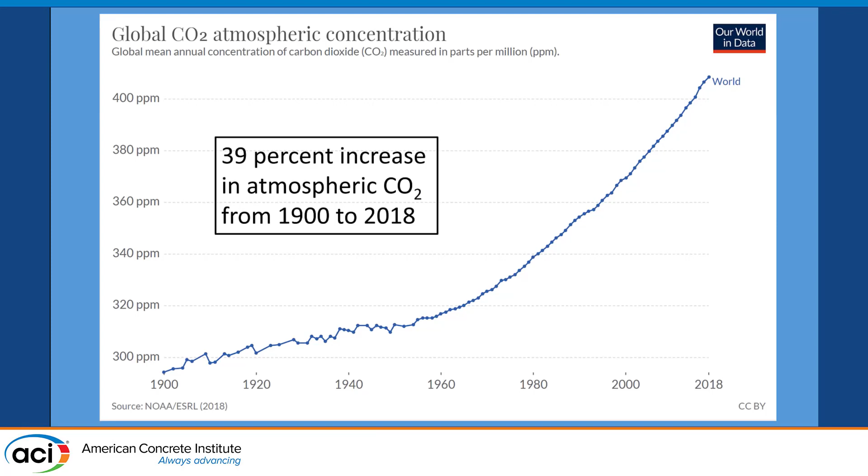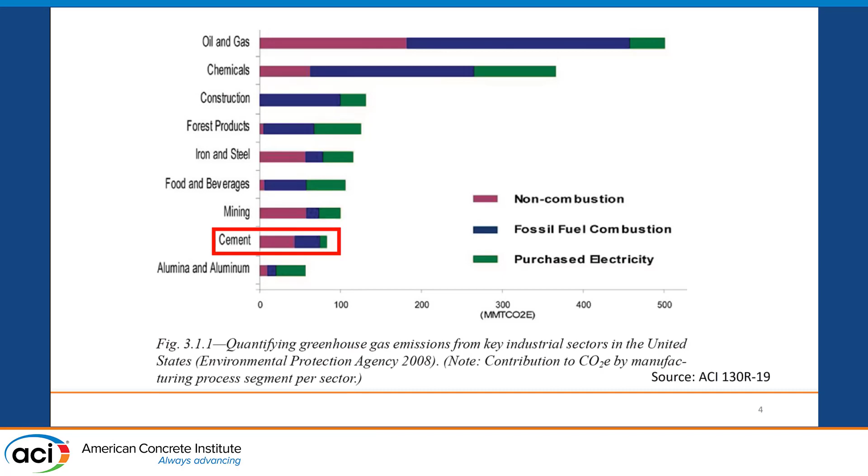So we can talk about a lot of different metrics and measures of the environmental effects of cement and concrete production and construction. But to me, the most important statistic of all is this, that each year, more than 4 billion metric tons of cement are produced, and that production accounts for 8% of the global CO2 produced. There are various estimates ranging from about 5.5% to as high as 10%. I've chosen to quote here a summary by Chatham House on concrete sustainability, where they cited a figure of 8%. In any case, that's a very large number.

And as I see it, the engineers, researchers, industry people, we're a group of very smart people. And if we can reduce the contribution of cement production and concrete construction, if we can even take 1% off of this number and make it 7%, we will have been contributing significantly to the reduction of CO2 in the atmosphere. So, we all have our talents and our ideas and our training, and I think we can do this. We can make a significant reduction if we put our minds to it.

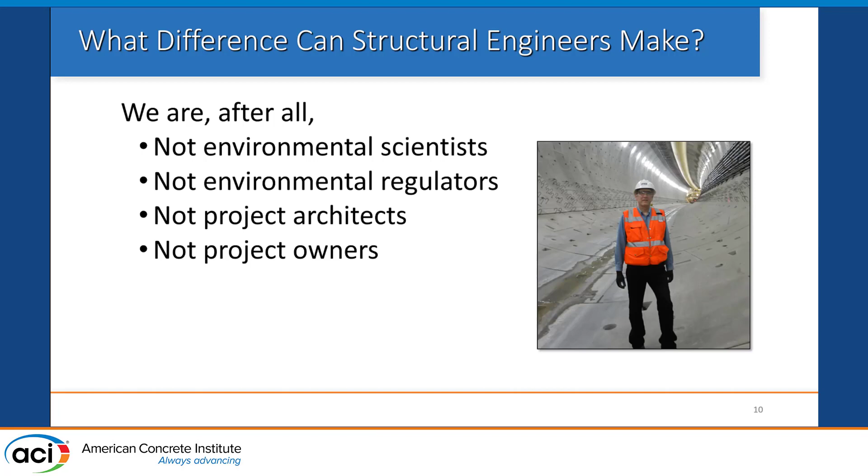I'm not a regulator. I can't help write rules or regulations related to environmental management. I'm not the architect. When I work on a project, many of the key decisions about a structure are made by the architect. And I'm not the owner of the project, so other key decisions are made by the owner about sustainability goals and so on. So what does that leave for me as a structural engineer to do in this process? Well, there are a few things, and I'll touch on these here in this list, but I want to emphasize the last bullet item when we get to that one.

So simple things that the structural engineer can do is to actively specify concrete mixtures that make use of alternative cementitious materials. We've just heard about a couple different solutions from the previous speakers. It's now possible within the context of the ACI 318 building code to use recycled aggregates, including crushed recycled Portland cement concrete as aggregates. It takes a little more work, more diligence, and paying attention to the quality and properties of the recycled aggregates compared to using new aggregates. But it is a possibility, and we as structural engineers can suggest that recycled aggregates be used.

Traditionally, we have assessed the strength of concrete at a time of 28 days, about 1 month. There is actually no reason why we can't say that the time for achieving sufficient strength is 35 days, 45 days, 60 days. If we can obtain a more sustainable product by allowing more time for it to reach its design strength, I think that is an excellent way for the structural engineer to influence that directly.

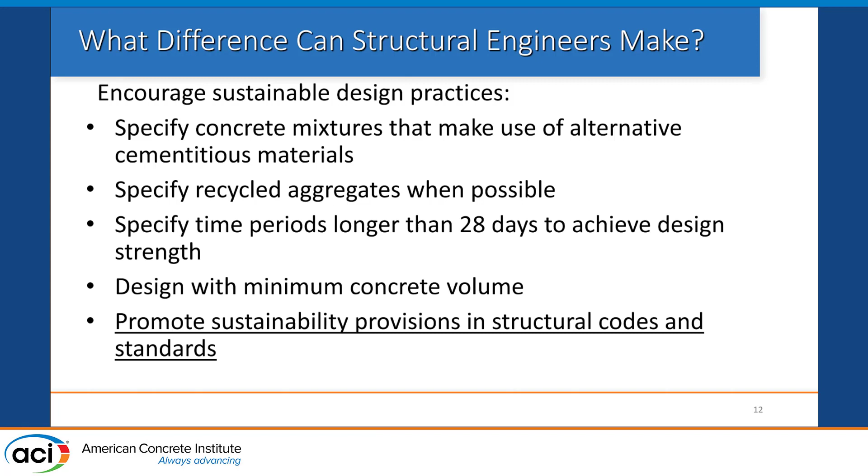And finally, I want to talk about the engineer's role in promoting sustainability provisions in structural codes and standards. That is what we are trying to do now at ACI and within the ACI 318 committee. So I want to describe a little bit about the history of sustainability provisions in ACI 318. The building code for the US for concrete contained no mention of sustainability at all until the 2014 edition. In that edition, there was a very brief mention, a new section introduced titled Sustainability, and it was a very minimal statement that says sustainability considerations are permitted to be used by the engineer in design.

But immediately after that, it says, if sustainability considerations are utilized, then they shall not take precedence over considerations of strength, serviceability, and durability. You might say, well, that's not a very strong statement, but it was a start, and it was the first part of introducing sustainability into the ACI 318 code.

Now, in 318-19, we had additional provisions that moved us further towards implementation of more sustainable practices. In 318-19, we stated that rather than just Portland cement and certain approved supplementary cementitious materials, SCMs, it is possible to use what are being called alternative cements. Whatever those alternative cements might be, they aren't specified. They can be used if they're approved by the engineer and by the building official.

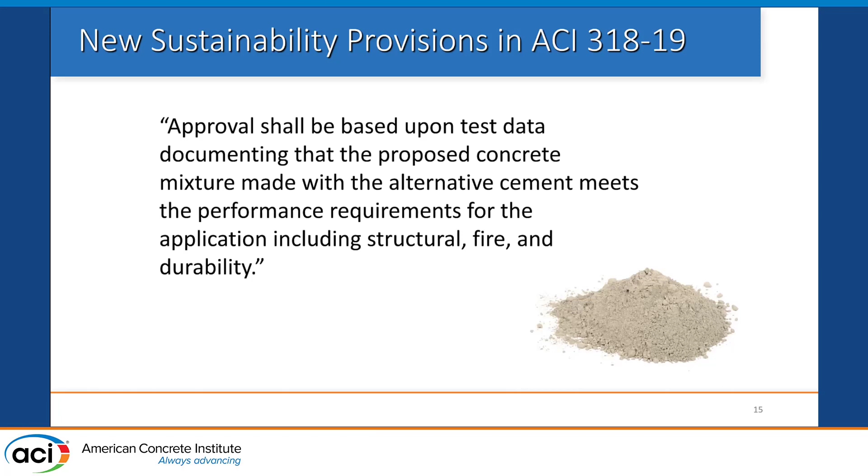It's possible that some recycled aggregates may comply with or meet ASTM C33 requirements, but not perform as desired by the structural engineer. So there's a caution here. It says use of recycled aggregates, including crushed hydraulic cement concrete, in structural concrete requires additional precautions. So it doesn't get very specific. It just says be careful and look carefully at your aggregate sources and so on.

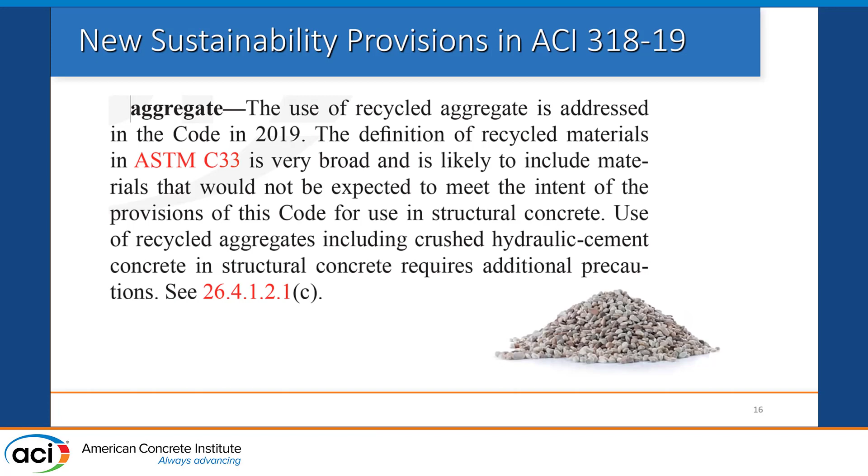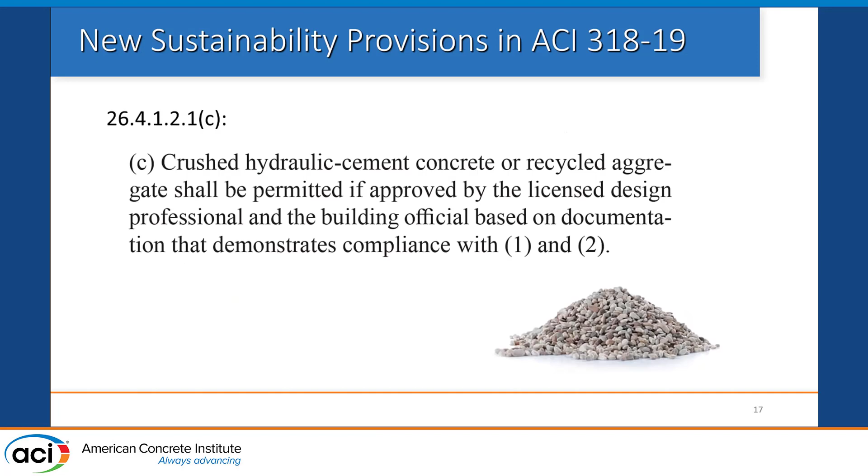In this section, further on in chapter 26, it specifies that if you're using crushed hydraulic cement concrete or recycled aggregates of some other kind, they have to be, again, approved by the licensed design professional and the building official, and they have to meet requirements 1 and 2, which are that the concrete made from these alternative aggregates or recycled aggregates has the same properties, same mechanical properties and durability required that would be produced with non-recycled aggregates.

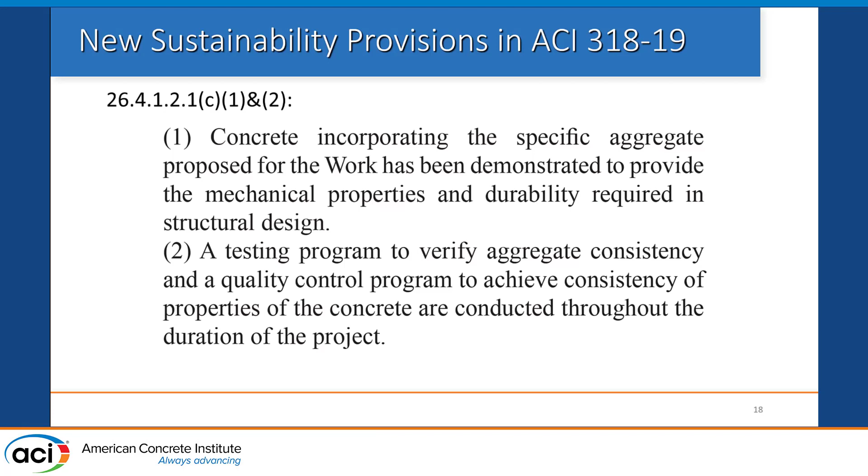And furthermore, a testing program to verify the aggregate consistency and quality has to be implemented. And most importantly, this testing program has to be maintained throughout the life or the duration of the project. So from the beginning to the end of the project, when concrete is being produced with recycled aggregates, testing must occur to ensure that the properties of the recycled aggregates have not changed over time, meaning when recycled aggregates are produced, if they're crushed concrete, they may come from different sources and be mixed together in one stockpile. And so this ongoing testing is a key part of using recycled aggregates.

Okay, on to what we're doing for 318 2025 edition. We have formed a new subcommittee, Subcommittee N, titled Sustainability. It was established at the beginning of this code cycle in 2019. The chair of that subcommittee is Shana Kelly, who is an expert in environmental aspects of concrete production. And she's a structural engineer and professional engineer who understands both structures and environmental impacts of concrete. So we're very glad to have her in that position. There are 12 voting members on this committee. They have 6 task groups. There's some overlapping membership, but they're working on different aspects of sustainability provisions for 318.25.

So what will these provisions look like? Well, traditionally in the ACI 318 building code, new provisions are introduced through an appendix, which then finds its way, perhaps in the next edition of the code, into a numbered chapter within the code. So what Subcommittee N is writing is a new appendix on sustainability. And it's very important to understand that this subcommittee is establishing provisions that will facilitate sustainable design, specifically approved methods for assessing the environmental product declaration or embodied carbon in a concrete mixture. Also, the life cycle analysis of carbon in a concrete structure under the ACI code.

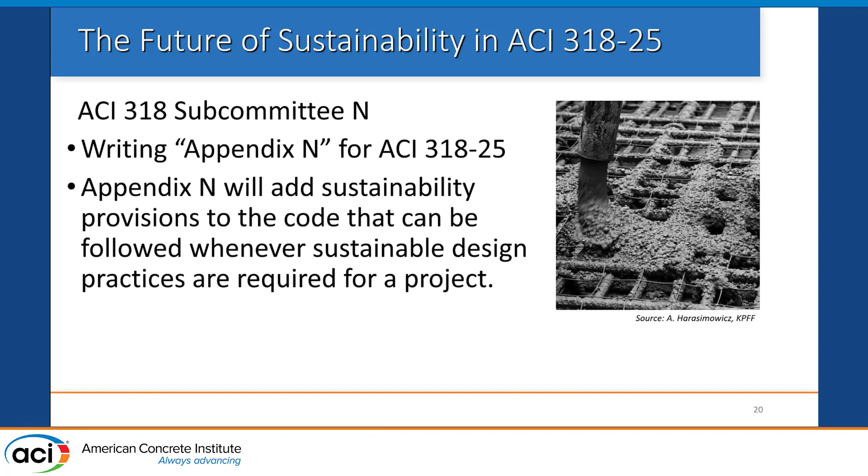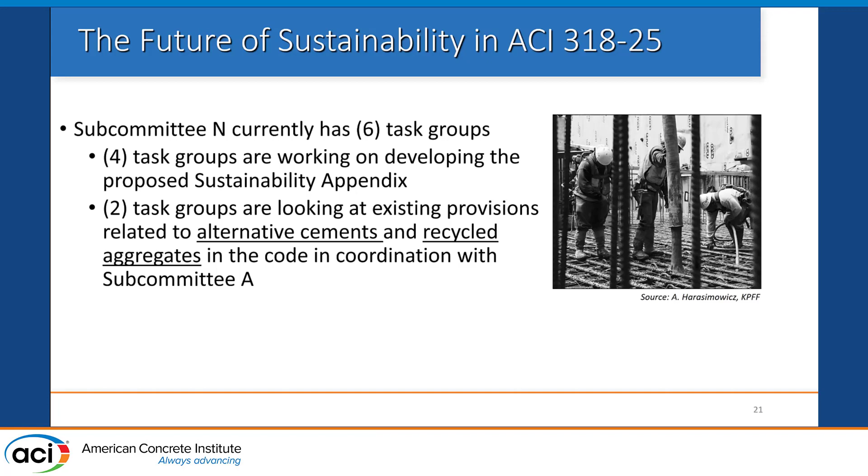A year from now, when we have the full ACI JCI seminar, I'll be able to report on more details of that appendix. For now, we know that they are working on the appendix language itself, and also coordinating with other sections of the code and other technical committees to make sure that there's consistency throughout the code, particularly regarding regulations for alternative cements and the use of recycled aggregates. This is the current outline of the appendix. Again, I can fill in a lot more details in 1 year, because the committee will probably be nearly finished writing and approving this appendix at that time.

So item 1 is the scope: where does this appendix apply? Item 2 is what I mentioned earlier, that it's providing guidance on acceptable ways to measure the environmental impact of concrete. It also seeks to measure the overall sustainable impacts of structural concrete systems, not just the material, but the entire system, including, for instance, thermal mass and how that affects the sustainability of a project and its overall environmental impacts.

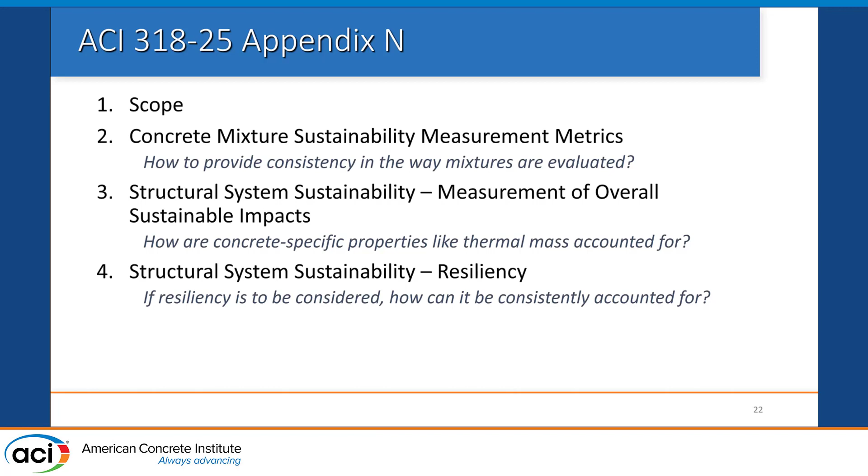And then a section related to resiliency, to describe how resiliency, that is, extending the life of a structure, extending its resistance to extreme events, say, relates to sustainability. So those are the four main topics that will be in Appendix N. And as I said, I'll be able to give you a lot more detail in about a year.

I just want to point out, if you are interested in this topic, there are some resources described here. ACI 318, you can look at the current provisions that I outlined a little earlier. The ACI Committee 130. ACI 201 is the Technical Committee on Durability, and ACI 321 is a standards writing committee on durability. So since durability and sustainability are linked, you may be interested in those.

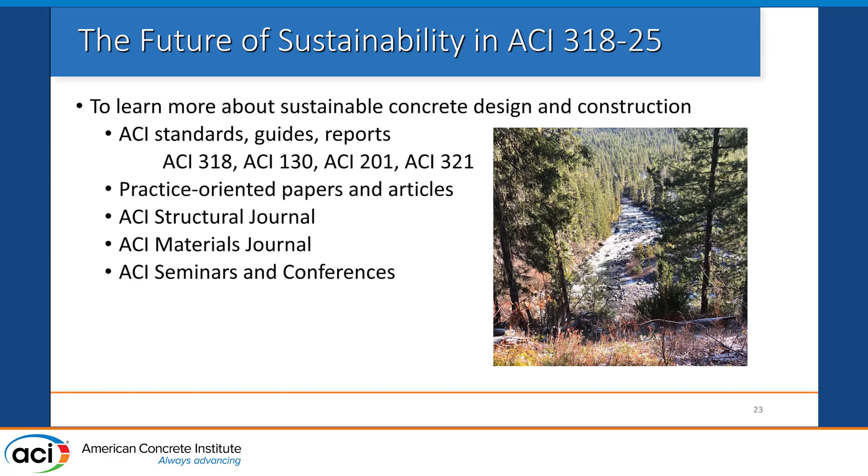I also encourage you to go to the ACI abstracts search database on the ACI website, which allows you to enter keywords, and that will bring up all kinds of resources on practice-oriented papers and articles such as those published in Concrete International, the Structural Journal, Materials Journal, and there are also ACI events, conferences, webinars related to sustainability. So I encourage you to look into those if you have further interest in this topic.

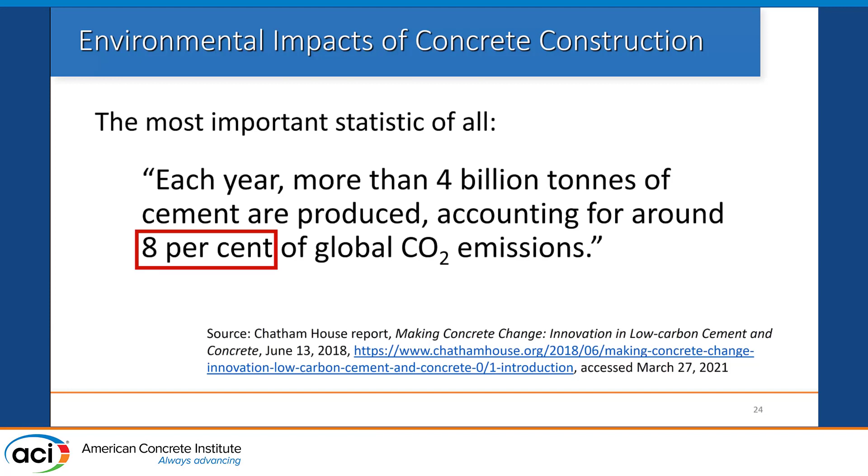So I just want to finish by returning to this quote that when we're talking about concrete construction, cement production accounts for 8% of global CO2 emissions. And if we, a group of what I like to think of as smart, clever, inventive and creative people, can reduce this number, and I think we can, we'll have a big impact on global warming. So I leave you with those words of encouragement. And that is the conclusion of my presentation. Thank you.

Thank you very much, Andy. I have a question. So this session has several objectives, and the second one is to describe how industry codes and standards are changing to allow greater sustainability to be introduced into the design process. So my question is very related to the design process. Many topics are related to material design, such as alternative cementitious materials or recycled aggregate.

But lastly you showed resilience. That is one of the contributions from the structural point of view on sustainability: more resilient or more durable structures can be produced by structural engineers. But that topic is very related to other provisions, for example seismic or other structural points of view. So how do you handle gathering this topic into Appendix N, or relate it to the other provisions previously developed for more conventional concrete structures?